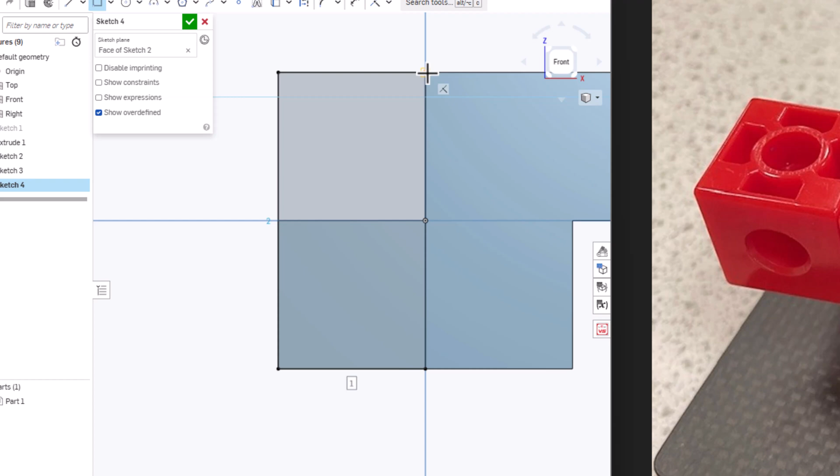Let me rotate that a bit so you can see what's happening here. That's causing a problem. So what we have to do is adjust some things here to make this work. Because right here, coming off of this piece, there's not a problem. The problem comes with this little line where it's intersecting or kind of has a corner edge - they're not really in contact with each other.

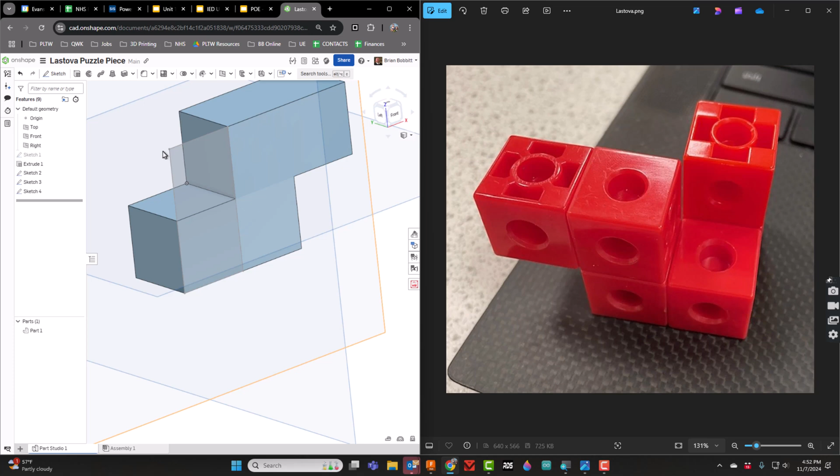Let me show you the best way I've found to fix stuff like this. One alternative is simply not to use that piece, but I think we can agree that's not a very good alternative. So I'm going to hit Shift E, and extrude this bottom piece, make it go 1 inch. I can go ahead and add that.

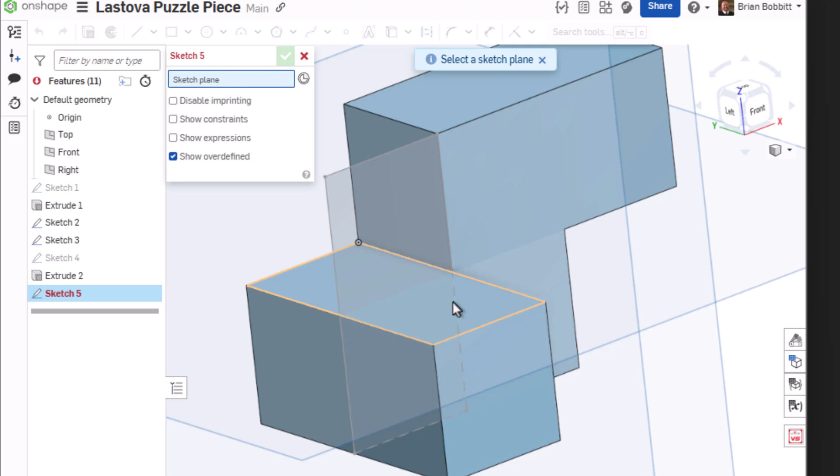I know that's not quite where we want to be just yet, but hang tight. So now I'm going to go back into Sketch. I think I'll just go right on top of this piece and press N. So I know that this piece needs to be just a little bit longer in this direction.

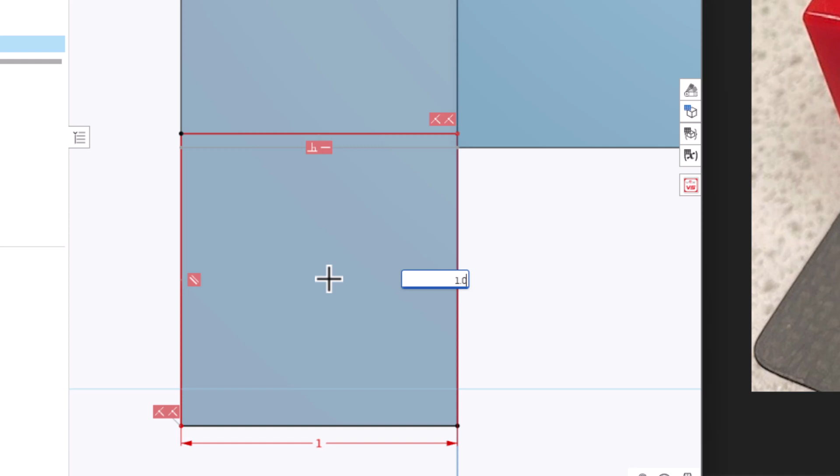So I had to cheat a little bit. I've got it 1 inch this way, which is perfect. I'll go ahead and press enter to go to the other side. But this time I'll say, let's make that 1.001 - so it's just slightly in there.

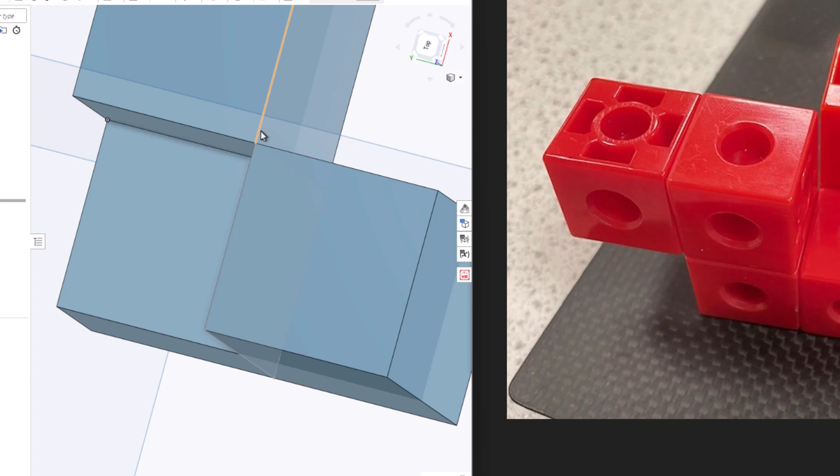So now when I go to shift extrude that, it's going to allow that to happen. Let me make sure I'm still on add. But what's happened here, and we've got to zoom in really tight to see it, is we essentially created a wedge - see, we're just slightly over, 1.001. Now when you go in and put that together in an assembly, that's going to be hardly noticeable.